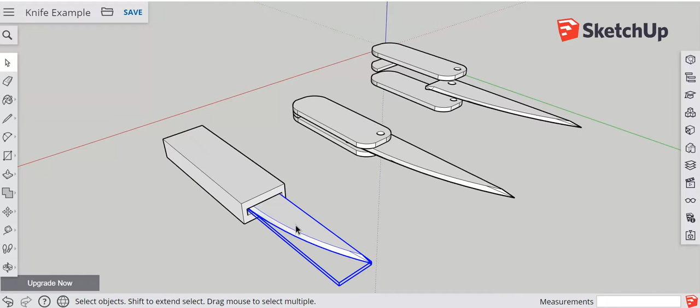You've got a choice here whether you want to make it, I've got a couple of knives here. This one down here has just got a hole in the middle of it, and the knife, which is a component, can actually just be shifted sort of in and out here. So that's one way to develop your knife.

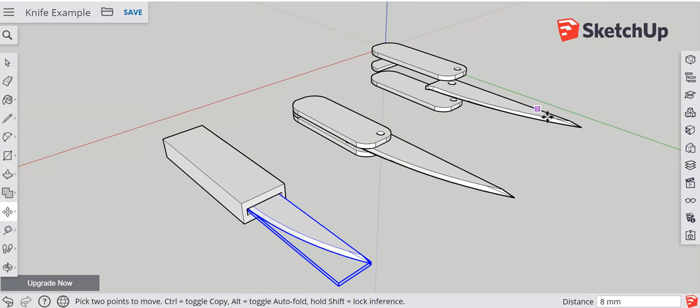The other one here is an example of sort of a sandwich where the blade is sandwiched between two pieces, and you'll see that I've exploded it on the one that I'm hovering on at the moment. So it's made up of two parts to the handle, there's a bit in between, and then the knife blade. So you have a choice of which way you want to go about.

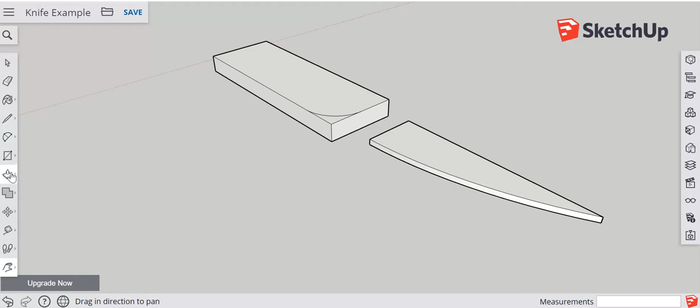I'll just show you now also an example over here of how to make the blade and how to make the handle. Just very quickly, I would draw a rectangle which is sort of in proportion to the knife blade. I've actually already created that blade. In order to make the shape, you can see on the top there that I've created a curve. I could just use the push-pull tool and make my way down. Now if I keep my finger down on the push-pull tool and hit the ground surface, it will actually get rid of that whole space in there.

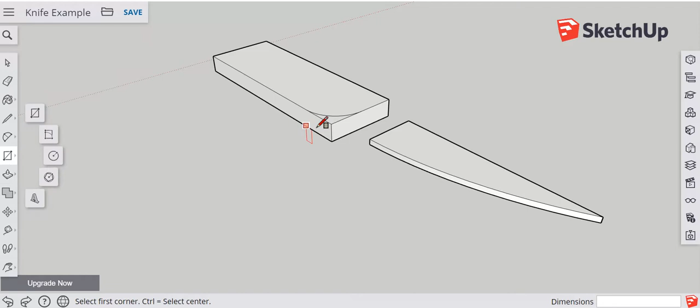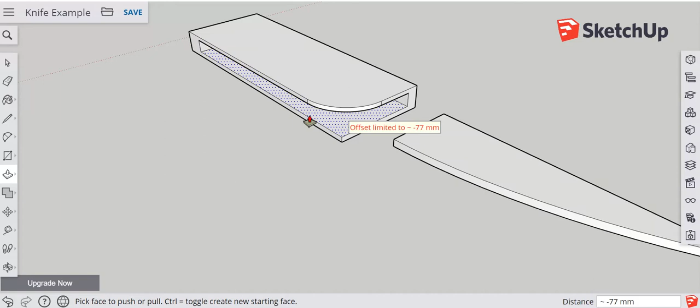Alternatively, what you could do is you could look at creating a rectangle on the end here if you're wanting to sort of not make a sandwich, just make it a solid, and you could push-pull this all the way down, and then that means that that's hollow inside, and that's where you could actually put your knife blade. Again, I could cut away that piece, I could try and draw another curve on that side and push that away as well. So there are various ways that you'll be able to make the handle.

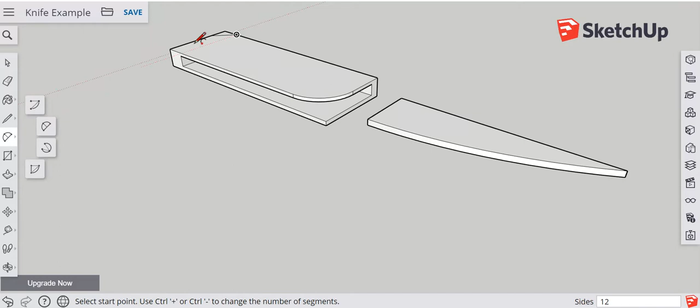Remember that the shapes on top, you can either use the line tool to actually create sort of hard lines and cut them away, or otherwise you might use the curve tool to actually create some curves in here. Okay, I think I'll now move over to the blade.

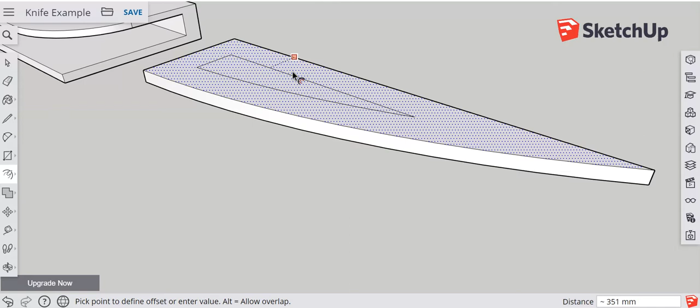What you can do with the blade, we learnt the other day about the offset tool. If we do an offset and you remember the measurement, I'm going to do one in here, and in fact I think I'll do it about, that looks about 150, enter. I'm going to do the same on the other side, so there we go, 150, enter. So it's the same on both sides. I'm going to draw a line from the end here.

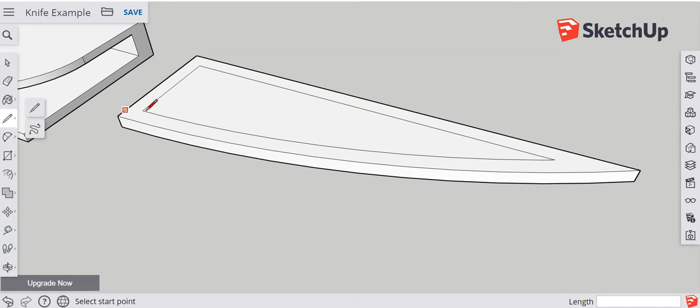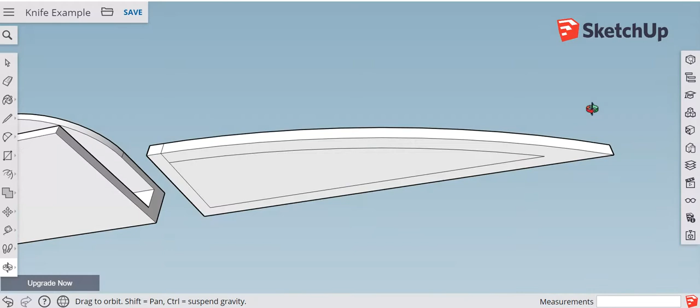It's frozen on me. I'm going to draw a line coming down, and then a line going across from here to here. And down at the other end we just need to straighten this out, so we'll just do when it turns pink, and on the other side I'll do the same when it turns pink. Now if we rub out these lines here, do the same on the other side,

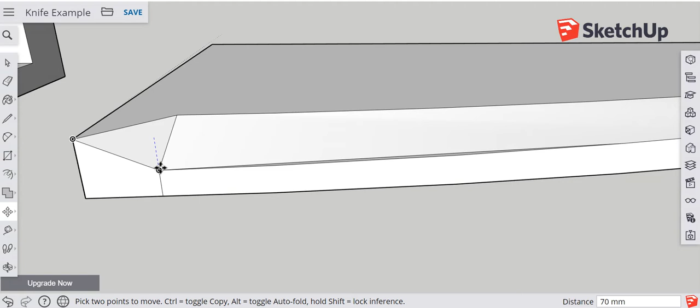and then we just use the move tool and try and bring it down from there down to approximately the middle, and from there approximately into the middle, and then H for hand tool to move along, and I'm going to do the same here where I'll move from there into the middle, and from here into the middle.

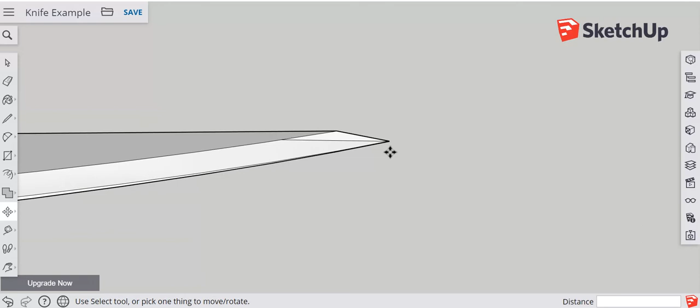Now it's only approximate, but it gives us a little bit of a look of like a sharpened end to the knife. We can actually go down here and you could possibly join those up. So if I bring that in and bring that one in as well, orbit tool, and you'll see here that it looks like I've got a sharpened blade.

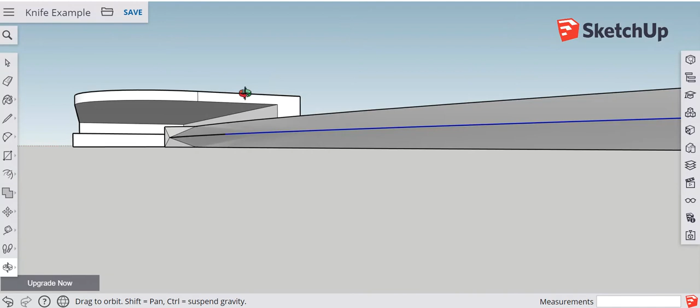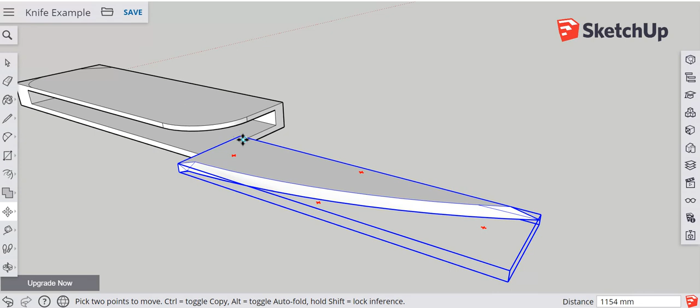Now you do have to be careful about how thick you've made your blade, just make it in proportion to the handle, and just remember triple click, make it a component, and then that will allow us to be able to move it into the handle. So now if I try and move it in, what we can do here is, I'm going to run out of time in a minute, but just join that with that one there and then push it in.